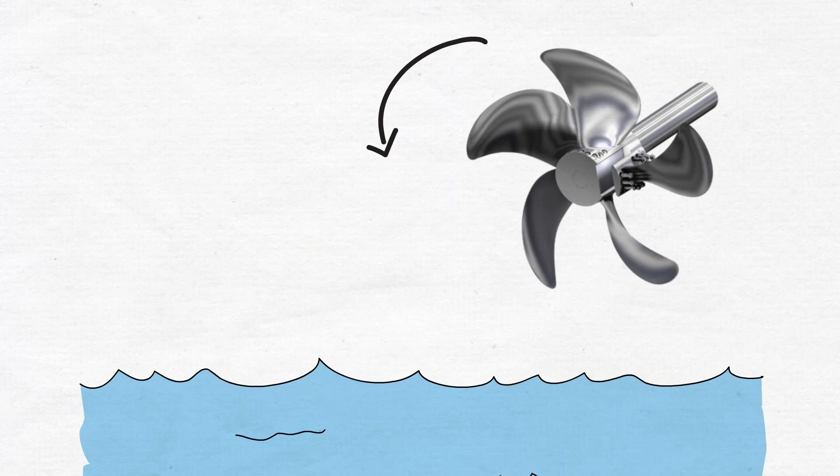As the propeller starts operating, turning clockwise or counterclockwise, the speed of the fluid is increasing, being pushed by the propeller, which creates a higher pressure compared to the area next to the shaft, as the water has been pulled into the propeller. And that's where Newton's law comes into play. The action is the propeller applying the force backwards, and the reaction is the ship moving forward.

The first person to successfully utilize the screw propeller familiar to us today was Isambard Kingdom Brunel, who developed a six-bladed version in 1845, fitted in the Great Britain ship, the first screw-propelled iron vessel to cross the Atlantic. Since then, the Brunel model actually changed very little, reinforcing the ingenuity of this revolutionary device. That is where the world has discovered multiple propeller types and designs.

But is there any standard propeller geometrical reference? The 10th International Towing Tank Conference, known as ITTC, initiated the preparation of a dictionary-like nomenclature of ship hydrodynamic terms, which was completed in 1975. ITTC in fact proposed a right-handed rectangular Cartesian system.

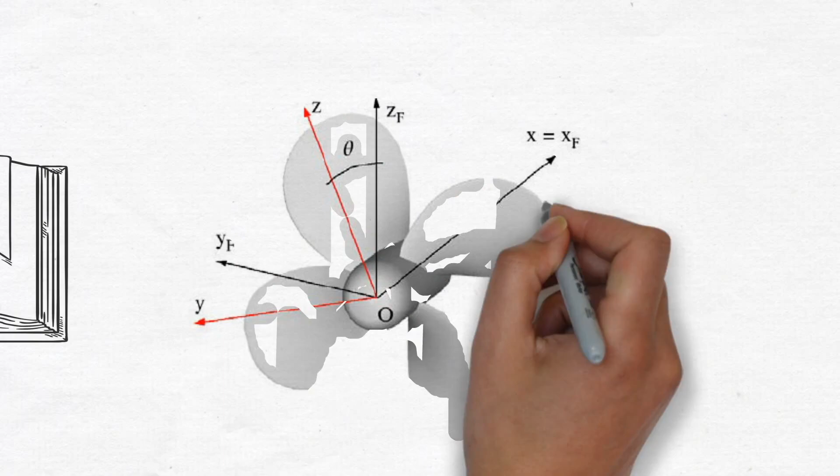For propeller geometry, it is convenient to define the local reference frame, having a common axis, such that x and xf are coincident, while yf and y, as well as z and zf, rotate relative to the oy and oz fixed global frame.

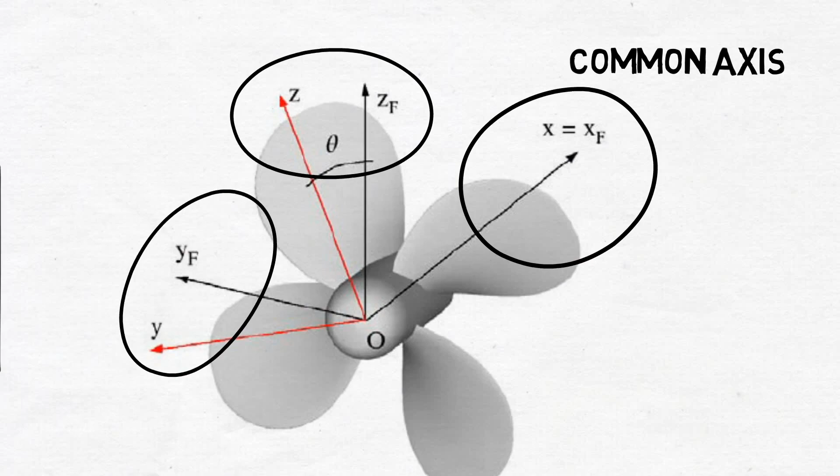The line normal to the shaft axis is called either propeller reference line or directrix, and the line formed by the intersection of the pitch helices and the plane containing the shaft axis and reference line is called the generator line. Now let's look deeper into the helix's geometry.

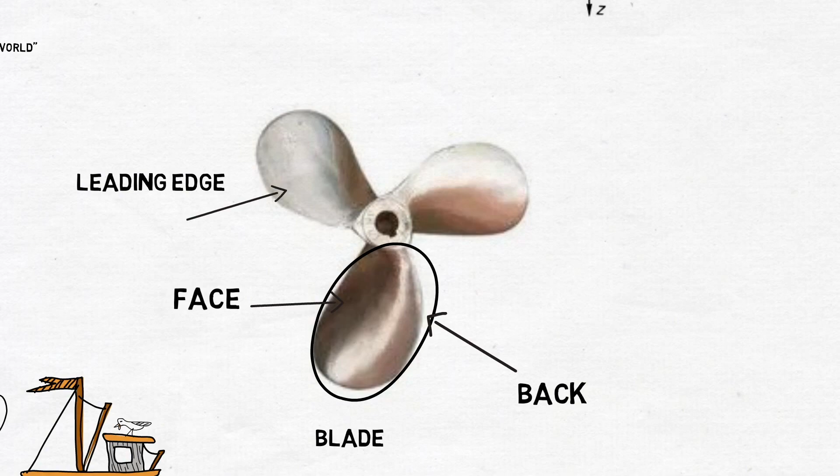The side of a propeller blade which faces downstream during ahead motion is called face, while the side of a propeller blade which faces generally the direction of ahead motion is usually called back. The edge that enters the water first as the propeller rotates is called the leading edge, and the edge trailing the leading edge is called the trailing edge.

Now, you might have heard multiple times in the hydrodynamic engineering lexicon the term pitch, which plays a fundamental role in our propeller analysis. So let's take time to have a look at it.

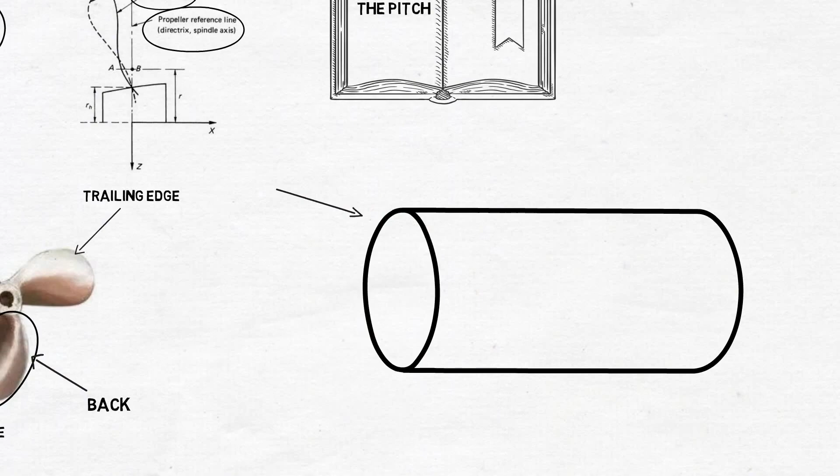Let's now consider a point P lying on the surface of a cylinder of radius r, which is at some initial point P0, and moves so as to form a helix over the surface of the cylinder. The propeller moves forward as it rotates, and this movement creates the helix. When the point P has completed one revolution of the helix, the rotation angle is now phi equals 360 degrees, or 2 pi.

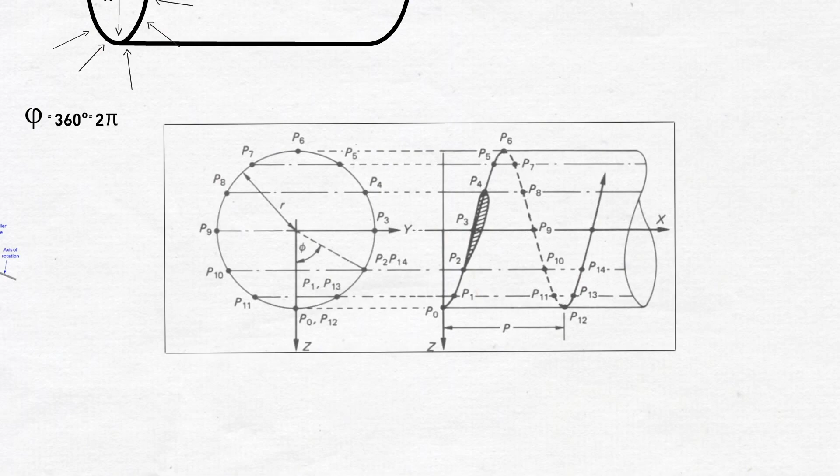The cylinder then intersects the xz plane and moves forward a distance of p. The distance moved forward by the helical line during this revolution is p, and the helix is given by the formula theta equals the inverse tangent of p divided by 2 pi r, where p is the pitch and theta is the pitch angle.

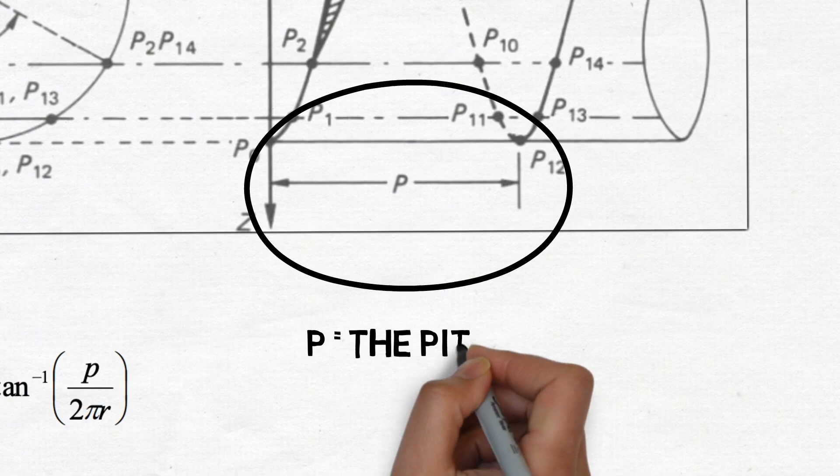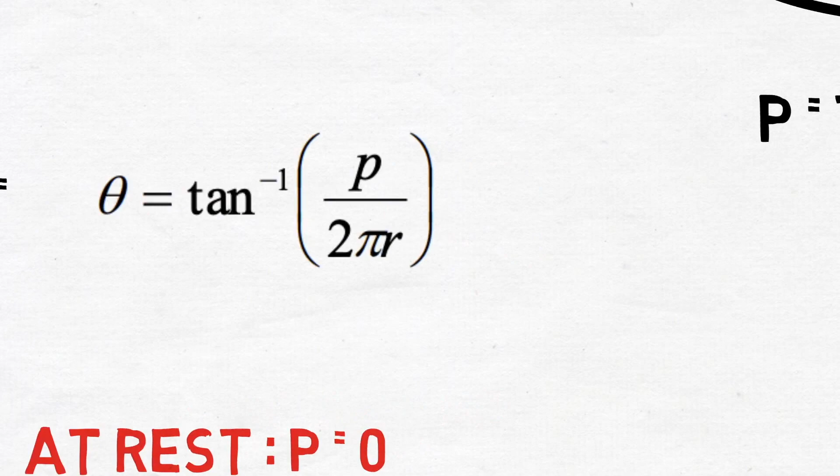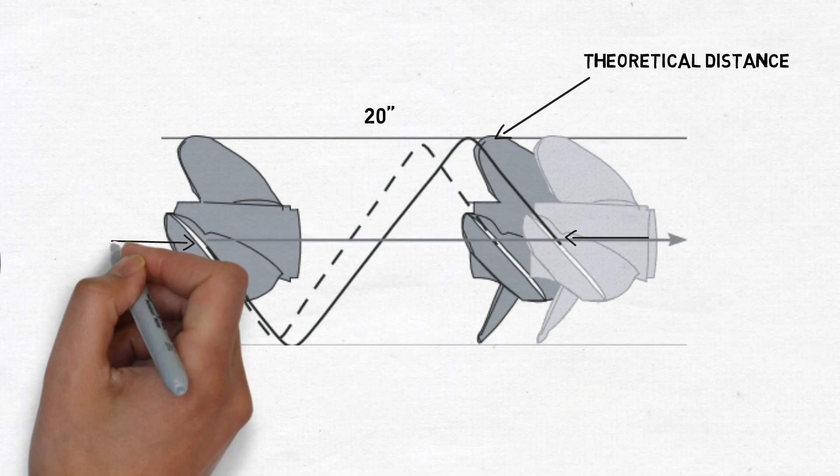The blade pitch of a propeller can be defined as the displacement that a propeller makes for every full revolution of 360 degrees, assuming no slip. But what is slip? Slip is the difference between the actual and theoretical travel through the water. Let's take an example. If a 20-inch pitch propeller actually advances 17 inches per revolution in the water, it is said to have a 15% slip, as 17 inches is 85% of 20 inches.

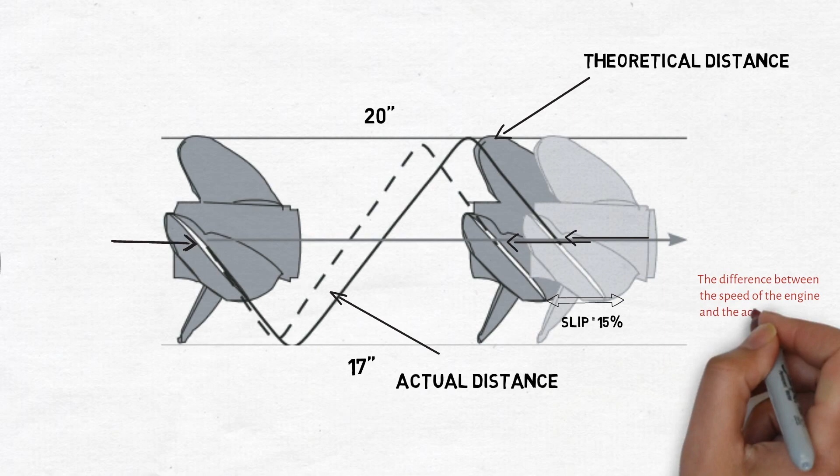Now, while building propellers, there is a very important fact to consider, which is the materials of construction. You need to understand that not only for propellers, but in today's technological age, construction materials play an important role, as no field of engineering would be complete without these materials. The construction materials industry is a significant contributor to the international economy, and its outputs deeply influence both the rate and quality of the construction work.

Generally speaking, the materials used for marine structures need to withstand seawater in the long term, and therefore need to be corrosion resistant, such as aluminium and manganese. But aluminium is generally preferred due to its lighter weight and good strength properties. And so is the case of the 2 and 3 blade propellers, while a 4-blade propeller is typically made of stainless steel, which is an alloy steel known to be heavier and stronger than aluminium, also known for exhibiting corrosion resistance properties due to the formation of a very thin layer of chromium oxide, Cr2O3, on its surface, with 10.5% chromium as a minimum amount.

Now, is there any propeller type classification methodology? Propellers are indeed typically classified regarding 2 main factors: number of the blades and the pitch of the blade. Propeller blades may vary from 2, 3, 4, 5 to 6 blade propellers. The propeller efficiency will be highest for a minimal number of blades, but to achieve the strength factor and considering the heavy loads from the ship, sea, and weather, 2-blade propellers would not be enough.

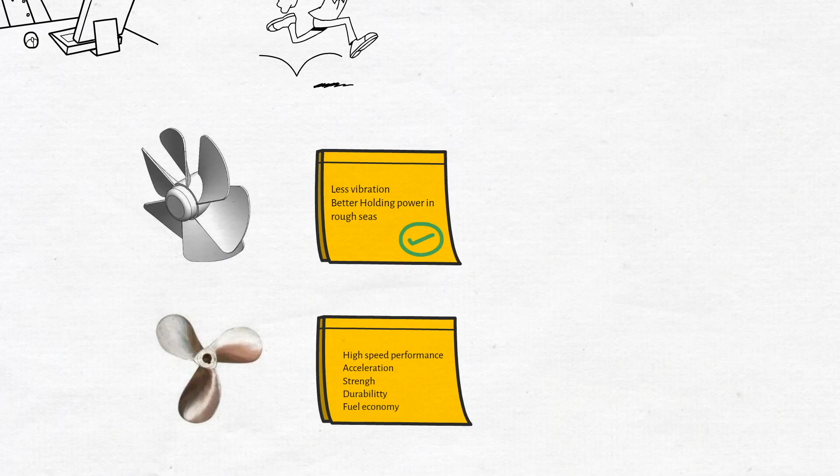In such cases, 5 to 6 blade propellers are used despite the higher manufacturing costs, as they produce less vibration than the 2 or 3 blade propellers and have better holding power in rough seas. But the most commonly used for cruising boat types are the 3 and 4 blade propellers, as they give good high-speed performance, better acceleration, as well as better strength and durability properties. Propellers like the 3-blade propeller provide better fuel economy than all the other types.

On the other hand, the blade pitch can be classified into what we call FPP and CPP. The FPP refers to the fixed pitch propeller. In fact, the blades of an FPP are permanently attached to the hub. The position of the blades and the pitch are permanently fixed and cannot be changed during operation. They are robust, reliable, lower cost than CPP, and they have good maneuverability.

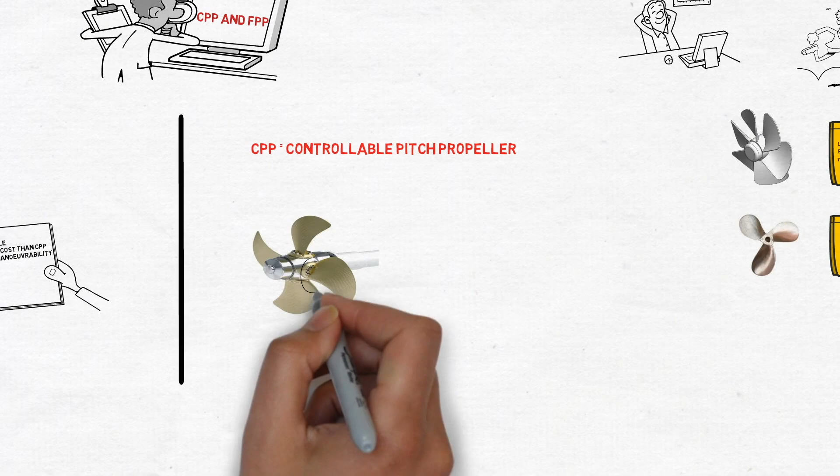While the CPP refers to the controllable pitch propeller. It is possible to alter the pitch by rotating the blade about its longitudinal axis by means of a mechanical and hydraulic arrangement, which helps in driving the propulsion machinery at constant load, by altering the pitch to match the required operating condition.

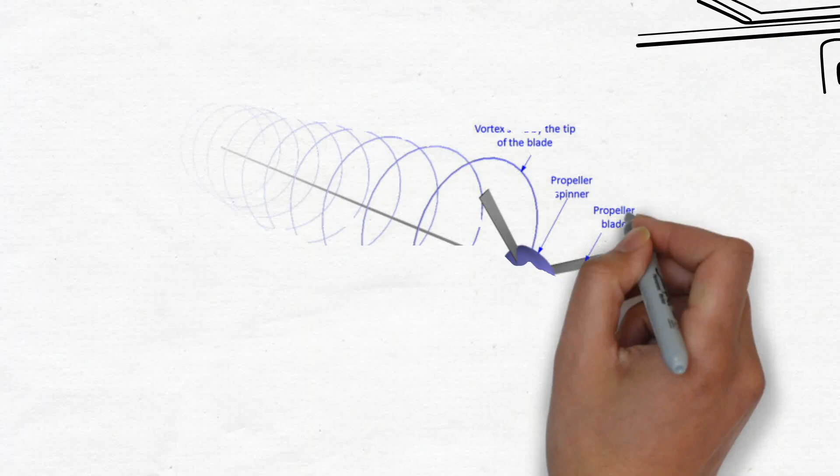Now, all this information we gathered about the propeller's geometry, materials of construction as well as the classification methodology takes us to the last part of this video, which is to finally understand how propellers actually work as a part of the ship. Marine propellers achieve propulsion by using their angled blades in order to generate thrust. The same concept can be noticed for airplanes in order for them to achieve lift.

The action produced by propellers is analogous to swimming by humans, pushing the water down and back. The propeller is pushing the water down, which will automatically create a water current behind the blades, leading to a pressure differential between the two sides of the blade, a positive pressure and a negative pressure. The positive pressure is created by a pushing effect of the underside of the propeller blade, while the negative pressure is due to the pulling effect created by the top side of the propeller blade.

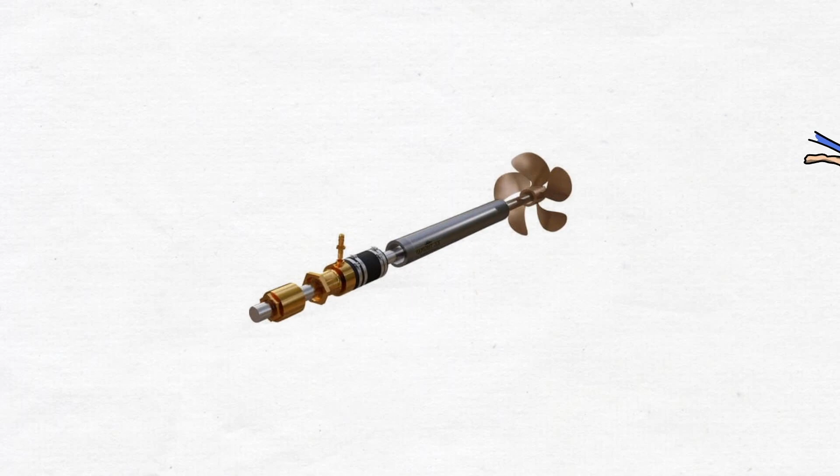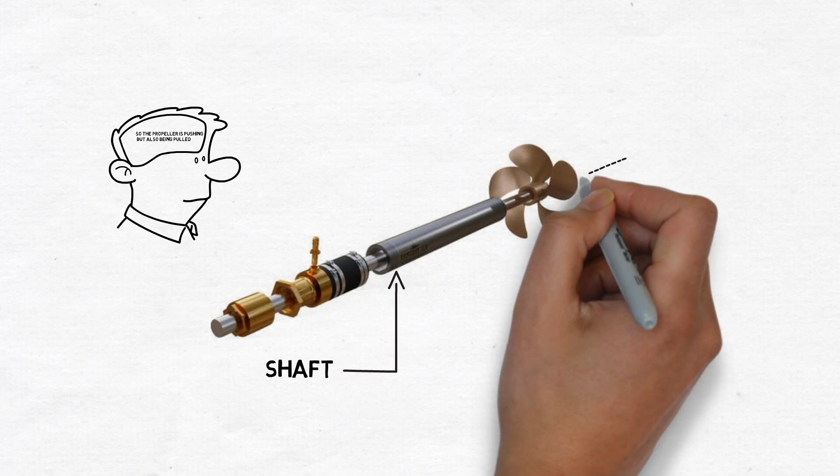But of course, the propeller is not carrying out its mechanism alone. A whole linked mechanism plays an instrumental role in the successful accomplishment of the work. In fact, the propeller is only part of a long handle called the shaft, which is directly connected to the main engine, which makes the propeller both, if we can say, dominant and subordinate, pushing as well as being pulled through the water. The propeller can produce two types of thrust, axial and transverse.

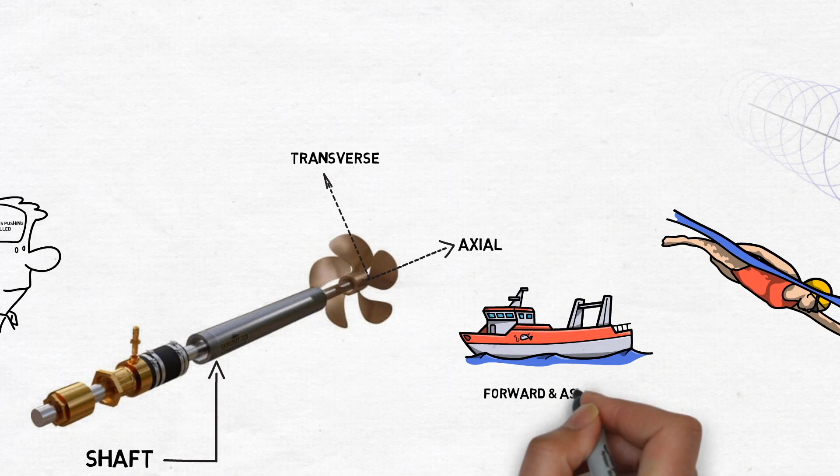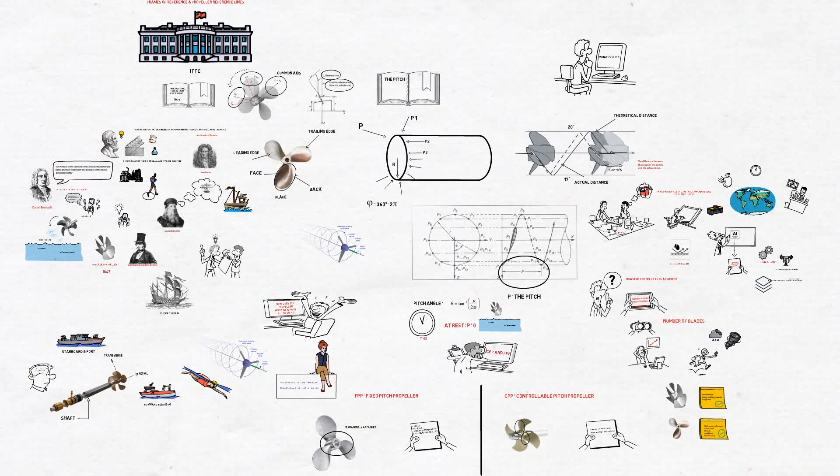The axial thrust produced by the propeller against the water acts on the thrust bearing of the intermediate shaft, which makes the ship move forward and astern, while the transverse thrust is caused by the interaction between the hull, the propeller, and the rudder. It is the tendency for a forward and astern running propeller to move the stern to the starboard or port direction. See you on the next video.